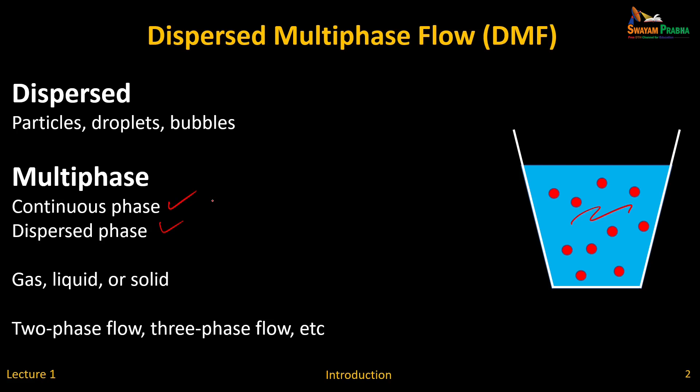Now, as all of us know, each of those phases, both the continuous phase as well as dispersed phase, can be gas, liquid, or solid. And also there's no reason for limiting to 2 phases. You could have 3 phases, 4 phases. And of course, the more phases, the more difficult the problem gets. Okay. You can have 9 different combinations because continuous phase can be gas, liquid, or solid, and dispersed phase can be gas, liquid, or solid. So there are many examples.

So you can have what are called gas-solid flows, and I've given a bunch of examples: volcanic eruption, dust pollution, so on. And gas-liquid flows, you have rain or fuel spray, or even when I'm talking, I'm throwing a lot of droplets around. So those are gas-liquid flows. Gas-gas flows doesn't make any sense because they are going to mix easily. When you have a multiphase flow, if everything mixes very quickly, then that becomes a single phase. Okay, so therefore gas-gas is out of question.

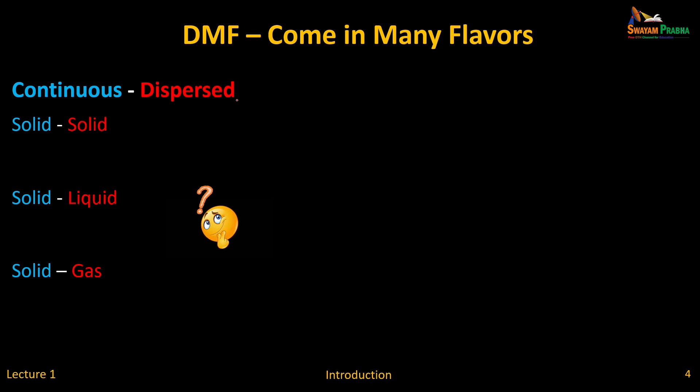And of course you can have liquid-solid, liquid-liquid, and liquid-gas. So very many different. So in one stroke we are trying to, in this course, cover some basics that will apply to all these problems. Okay. Of course, can the continuous phase be solid? Can you have a solid flow, solid-liquid, or solid-gas flows? What do you guys think?

I think so. Yes. Powder is flowing and there is a lump of solid in it. So the powder behaves like one fluid and the particle behaves in the other phase. That's right, but I'm talking about the continuous phase being solid. Powder. Yeah, you're right. You could have a powder flowing through a slope. Yeah. A lot of powder sand flowing through a slope, and there is a lump of solid inside it.

No, you're absolutely right. I was also thinking of, for example, in high-speed flow shock problems, this is a very important thing because you can have a solid within which you could have voids. It could be an explosive, for example, and you smack it very hard, it starts flowing. So in other words, what becomes a solid at a very high strain rate may behave like a fluid. It may not behave like air or water, but it may end up flowing.

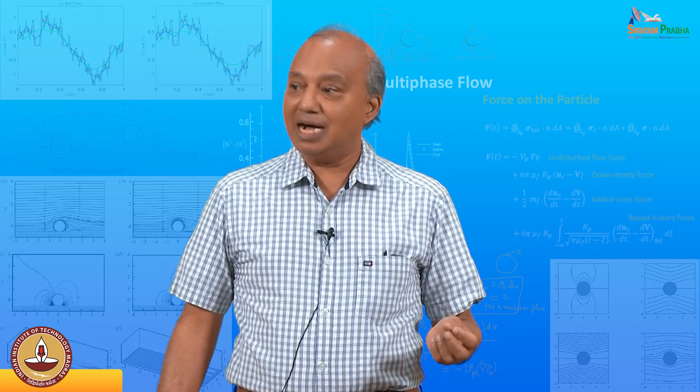So you could have very complex sort of dispersed multiphase flows, and as he points out, you could have a solid powder flow in which other particles could be embedded in there. Okay, so every variety is there in this problem. And also one of the things that makes it really vexing is that there are too many terminologies. There's particle-laden flows, droplet-laden flows, liquid sprays, bubbly flows.

So one of the things is there is no one set of governing equations. It's not like Navier-Stokes equation. That's one set of equations there. You go there and you solve it, then you're done. Multiphase flow, what makes it very hard is that there is no one set of go-to equations. Everybody decides upon a certain set of equations, and usually very smart people, they make a lot of assumptions depending on their application.

And this whole course I'm going to talk about is how do you simplify the governing equations so that you can get something useful out of your analysis. Okay, so that's the kind of focus. So be careful that there is a lot of interesting physics there, but there is also a lot of confusing terminologies out there.

Now, one of the things I would say is that if somebody asks me what problem you're working on, I say that it's sort of every problem around us; virtually in some way or other, it's a dispersed multiphase flow. So you have volcanic eruptions, so a lot of problems in nature are multiphase flow. So you have a dust storm, here a supernova, or it could go to the other extreme. These other three problems are at very gigantic scales.

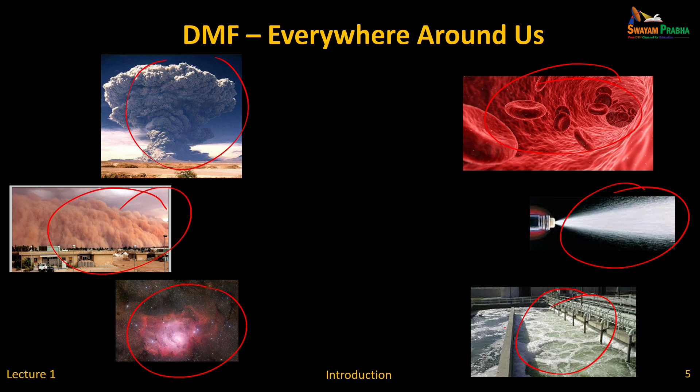On the other hand, you have red blood cells flowing, or an engineering problem such as a fuel spray or cleaning of wastewater. So examples are galore. What makes multiphase flow really interesting and at the same time really hard is the fact that you have two phases and they are talking to each other.

So you have the fluid phase, the liquid or the continuous phase, many different ways I will call that. It's sort of the one that permeates everywhere with holes in it. And the dispersed phase, which in this case I call particles. By the way, I will call them particles, but they could be droplets or bubbles as well. So you have two different phases, and we all know that fluid parcels talk to each other. In other words, they rub against each other.

So you have the fluid's Navier-Stokes equations. That's what takes care of the fluid interacting, the continuous phase interacting with itself. And the continuous phase interacts with the suspended particles, droplets or bubbles, by applying drag force or lift force, heat transfer, or it could have evaporation, mass transfer.

So the continuous phase talks to the dispersed phase, and the dispersed phase will talk back to the continuous phase. Forces applied on the particles and droplets must, by Newton's third law, be applied back. If there is evaporation, it must go to the continuous phase. So there is what is called a two-way coupling. The continuous phase talks to the dispersed phase and the dispersed phase talks to the continuous phase.

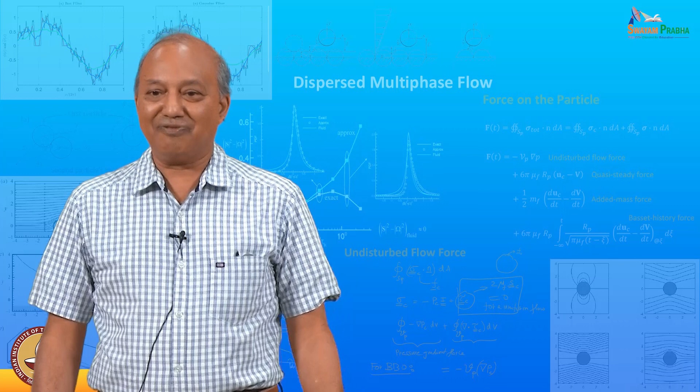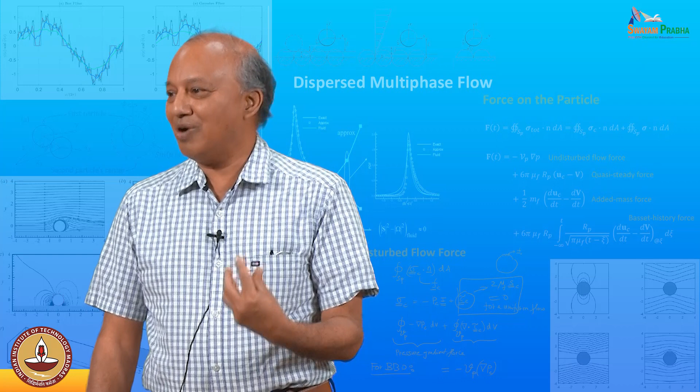Sometimes you might say, well, the back effect on the fluid is not that important because there are too few particles there, so let's ignore that. Or you may say it's very dilute, why bother with interaction between particles? That's the kind of judgment we will learn to make: when to throw things out and when not to. You want to throw out the bath water but not the baby with it. So that's the separation we will learn to make in this course.

But when you think about it, what you have is a continuum, which is the fluid phase, and it exists only outside the particles. And the particles, mostly we will talk about rigid particles, so they follow rigid body dynamics. So you don't have to worry about the flow inside. But if you have a droplet or a bubble, flow inside can also be important. So you have to consider all of them.

So there is interaction happening between the outside fluid and the particles. So when I talk about the fluid interacting with the particles, I am talking about truth, which is you have to look at the pressure field around the particle, shear stress around the particle, each and every particle, and you want to see how they move. Okay. In fact, yours is a great question.

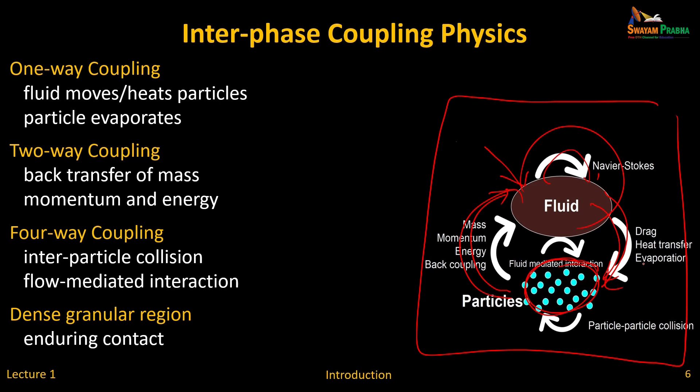So that's what makes this problem really hard. Let's say you have a fluidized bed. There are a trillion particles in there. Literally speaking, you got to take each of those trillion particles, look at the fluid mechanics around it. Even if they are rigid, they are moving, rotating. You got to take care of all those things. When I draw this picture, I'm talking about everything, like playing God. We know everything, okay? But then obviously that's not possible with a finite computer.

So how do you make those judgments? How do you make those reductions? How do you make it simple? So it's a question of modeling. As the saying goes, all models are wrong; some are useful. That means we understand the full physics, but then we try to reduce it to something that's solvable. You get a useful equation. If it is just an algebraic equation, so be it. Or if it's got to be a supercomputer simulation, we got to do it.

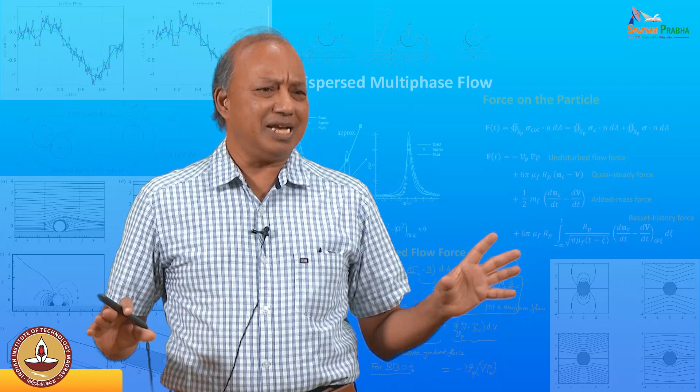Sometimes the problem is so hard that we will get only approximate answers. So those are the kind of stuff. So at this stage, I'm talking about the whole story. Okay, I haven't started making any assumptions yet. Any other questions?

So one of the things that makes this problem hard, as you asked, is that the range of scales is too many. Okay, when you go to very small scales, you may have issues such as viscosity, thermal conductivity, and so on. We are not going to talk about this a whole lot. We are going to take for granted that we know the viscosity of the fluid, and the particles, say, are rigid, and so on.

But now you also have microscale physics in the sense that you have particles, they may be 100 microns, a millimeter, depending on your application. And you can also think in terms of interparticle distances. Maybe on average they are a millimeter apart, and so on. So you could look at it from a microscale point of view, what's happening around one particle, what's happening around a cluster of, say, a few hundred particles.

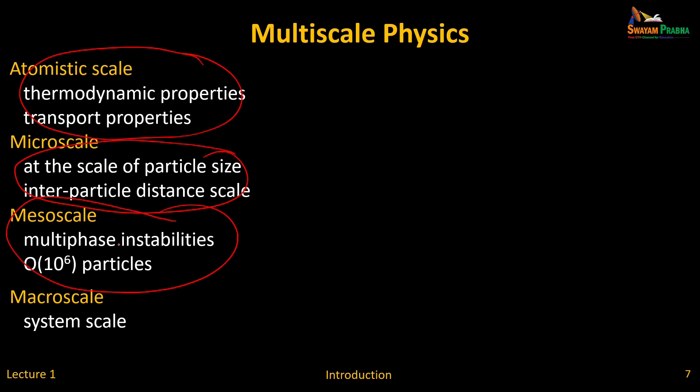Okay, because if they are going to be influencing each other, you need to know how they line up. Do they all line up one after another, or are they completely random? Those kind of questions become important. Now another thing that's very interesting is that these flows naturally segregate themselves into clusters of particles. Okay, and I will show some examples of it.

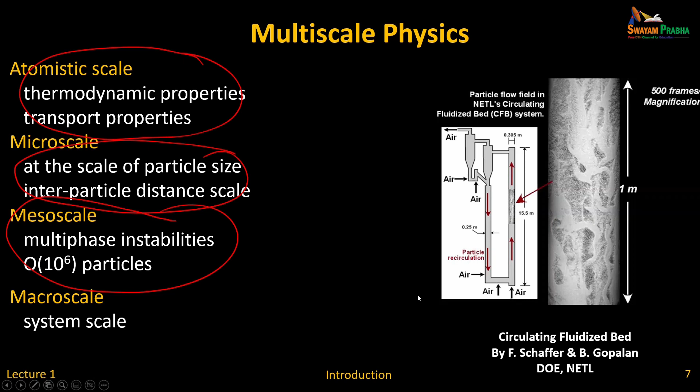Say this is one video, you may have seen this. This is a fluidized bed, circulating fluidized bed. It was taken at NETL. Okay, it's a really beautiful video. Let's see if it plays. Okay. So you can see they will keep zooming in. So now it's zoomed in. You can see clusters of particles and void regions, so you can clearly see that.

So I would call this a microscale view: what's happening around individual particles and their interaction. Okay. Now when you zoom out, you will see mesoscale. Mesoscale are the big sort of clusters of particles and void that you see. And the macroscale could be your entire setup.

So in other words, one of the nice things about dispersed multiphase flow, I see, is it naturally lends itself to this division. So what happens is that we cannot take care of every single particle and what goes on around each of them and at the system scale at the same time. So our best strategy is divide and conquer.

And divide and conquer, in this case; many times if you just have turbulence, the same problem occurs even in a single phase turbulence. But one of the biggest challenges there is, how do you divide? What do you divide? So here, a nice thing about multiphase flow that I find is that there is a natural length scale that tells you, okay, I can look at 100 particles or 1,000 particles, that's your micro scale. Maybe I look at 1 million or 2 million particles, they form layers of particles or clusters. Maybe I can study them. Then we study the whole system. So in other words, this multi-scale nature of this problem is something that we are going to be focusing on.

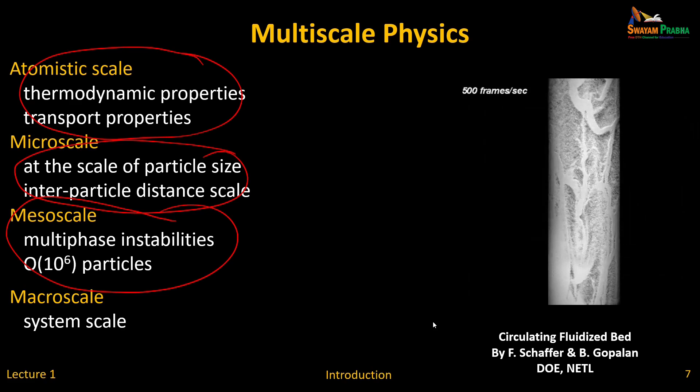So if you want to study a fluidized bed in its entirety, of course you can throw it in the computer and there will be lots of models in there and you produce pretty pictures, etc. But what I want to talk about in this course is that you want to be questioning all those models that go in. So if you simulate the whole fluidized bed, is your simulation understanding the fact that there are layers of clusters and voids in there? How do you take care of it? Or are you worrying about the drag forces on individual particles? Have you taken it correctly? Are particle-particle interactions being taken into account correctly? They are all there in the models, but how good are the models?

Sometimes they are good and you may say, yes, it's fine. Sometimes you may say, well, this model is good, but this model is not good. The uncertainty or error in this model is very big, so I want to improve that. For that, you may have to go to a micro scale or meso scale study of that smaller scale in greater detail, develop your models and then send them to your big simulation. How do you do those things? Those are the kind of things I would like to discuss in this course towards the end.

Now in terms of introduction, what really makes multiphase flow really hard is that it is invariably turbulent. It could be classical turbulence or it could be what is called pseudo turbulence. Even if you have a slow moving laminar-like flow, since particles are always going to be randomly distributed, they are going to bump into each other randomly. Even in a laminar flow there is going to be pseudo turbulence. So this random position and motion and the chaotic flow around them contributes to what is called pseudo turbulence. So in some ways you can argue that the particles are going to be increasing the turbulence. They are going to change the turbulence of the flow.

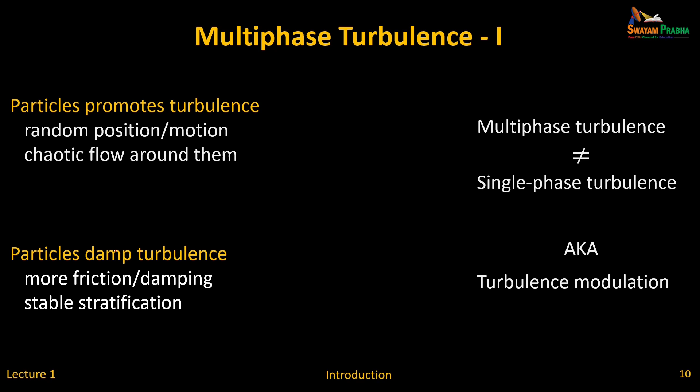So in essence, multiphase flow turbulence is not the same as what would exist if you removed all the particles. For example, for a single phase gas or liquid pipe flow, there's a lot of literature on turbulence, a lot of understanding, a lot of models. But if you throw a lot of particles or bubbles in there, you just can't use the same turbulence models anymore. It just changes and the problem gets really hard. In fact, we know the turbulent pipe flow profile. Now depending upon the size of the particles and density ratios, the turbulent profile can profoundly change.

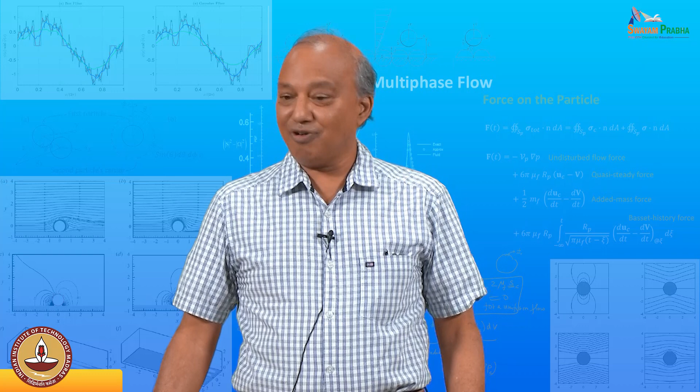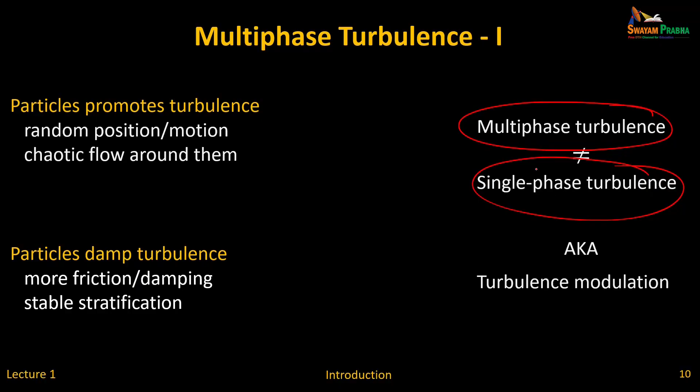Therefore, people don't know offhand what the answers are, and that's what makes multi-phase flow a very rich problem. Okay. So, Bala? Yes. So if you have a laminar flow and you were to put particles in, could it become turbulent? Yes, that's also possible.

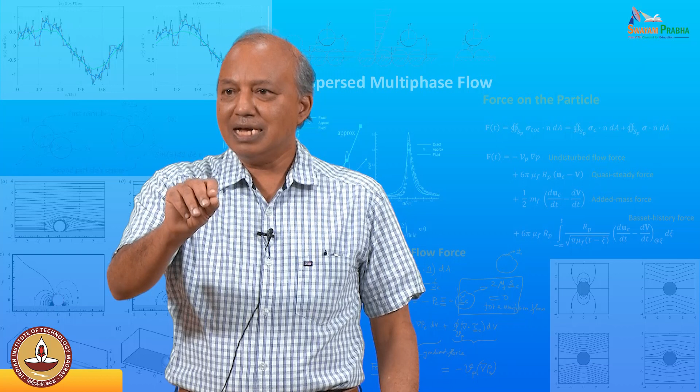In other words, if you put a velocity probe in a laminar pipe flow and you put particles, you will see signatures. It won't be a single phase. In a single phase, at that low Reynolds number, you may get a constant velocity measured by the probe. But each time a particle goes by, you could have a wake effect of the particles and you have signatures, and the particles are arriving randomly because they are not in a lattice. Therefore, you will get turbulence-like signatures.

In fact, your question is very good, in that some of the Kolmogorov theories don't necessarily apply to this turbulence anymore. So the closures that people use for single phase turbulence are not necessarily good for multi-phase turbulence. And I will say more about that.

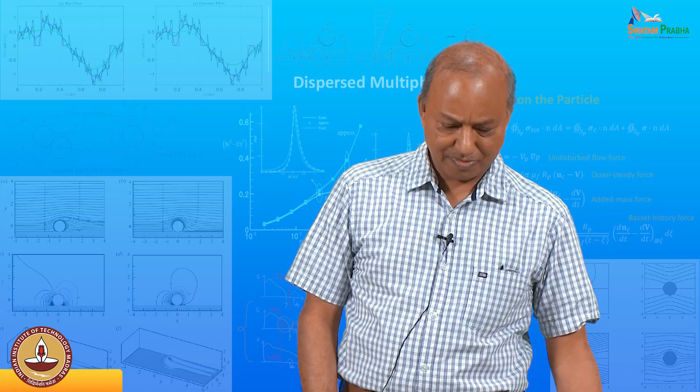The other thing is, in turbulence, we say turbulence mixes, right? So when you put particles, let's say you have a bucket, that's the usual example I use. You have a bucket, you stir, you create turbulence, and you put a lot of sand in it. Let's not worry about settling, okay? The question I ask is, is the sediment concentration going to be uniform? You would think so, right? You drop ink in there, some dye, it will spread very well. What turbulence does is it mixes. So you would expect that the turbulence will mix particles very well.

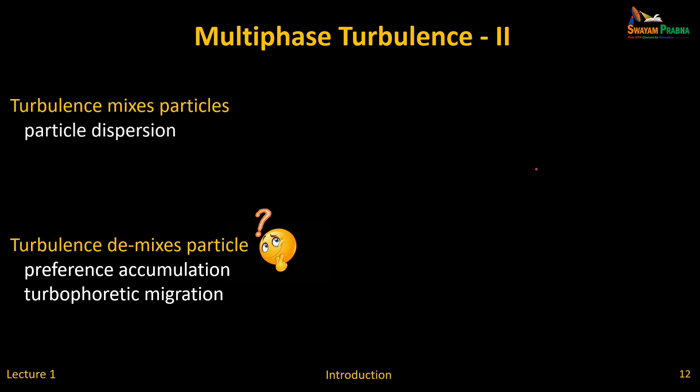But the strangest thing is that turbulence also demixes particles. The easiest way to think of it is that turbulence is a bunch of eddies moving around. What do eddies do? They spin out heavy particles, and things that are light, like bubbles, go to the center of the vortex core. So when you put particles, naturally they will demix. So there is mixing as well as demixing. So turbulence plays a dual role.

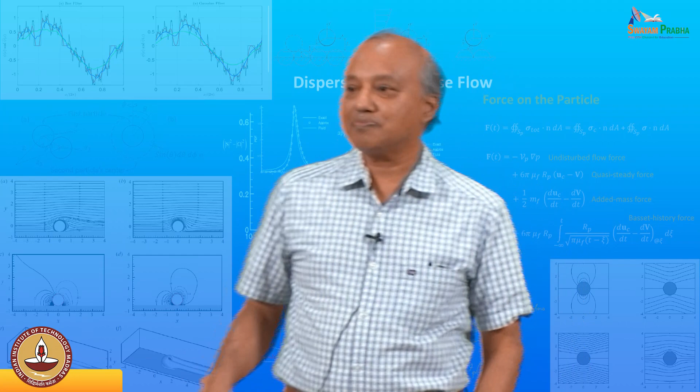Just like particles, how did they affect turbulence in the previous slide? I said they can enhance turbulence or damp turbulence. And turbulence can mix particles or demix particles. So the point is that it's a very complicated problem. Yes? I think cohesion and adhesion might be responsible for this, the change in mixing and demixing of the bubbles and all. Is there any other parameter responsible for this?

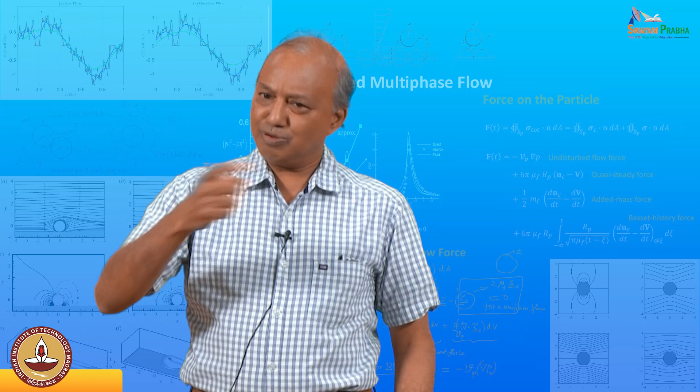Collision will play a role, but think of it this way. You have an eddy spinning around and you put a particle which is heavier than the fluid; it will go, but it will not closely follow the streamlines of the fluid because the particle is heavier. It's sort of like having a stone tied at the end of a string, and you do this, you let go, it wants to spin out. Same thing happens, heavier ones will spin out. So particles in a vortex will avoid the core of the vortex and they will congregate at the outside.

That's called preferential accumulation. Whereas on the other hand, lighter things like plastics and bubbles will be attracted and come to the center of the vortex. And this is really happening, because in the ocean there are big gyres, and all the garbage that we throw in gets collected at the center of the vortex core. So this is a general rule. Lighter particles go to the center of vortices and heavier particles get spun out.

Therefore, in turbulence, if you have particles that are very small, they behave like molecules and will be evenly spread. But when they get to the right size, they may get spun out depending on the density ratio, or they could aggregate in some specific regions. Therefore, if you have a turbulent flow and you want to know where the sediments or sand particles are, well, it depends.

Okay, if the Stokes number, which I will talk about later, is right, they will demix. They will not be uniformly distributed. There will be regions where there are more particles. There will be regions where there are fewer particles. Okay, so that's what I was talking about.

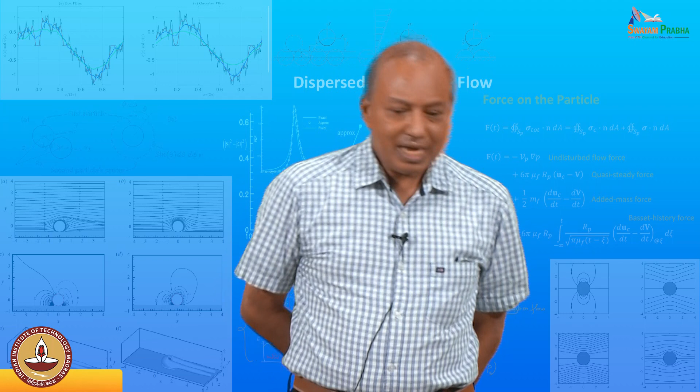Yes. So do you expect the behavior of the particles at a micro scale to mimic the behavior of atoms at an atomic scale? It will not, because atomic scale processes are generally non-dissipative.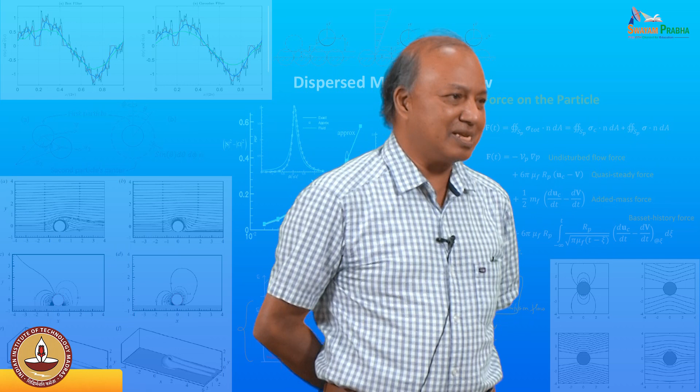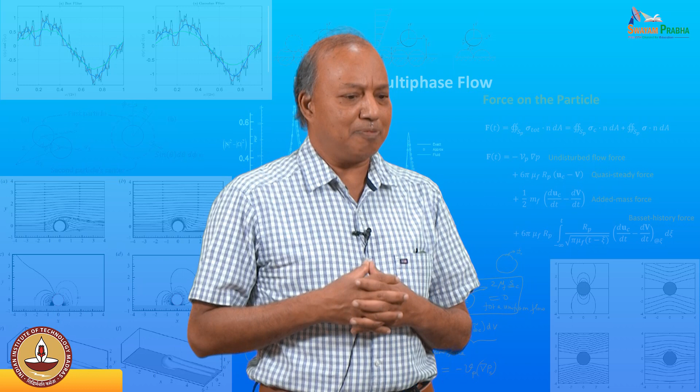But molecular scale processes are not dissipative, and so there is no analog, for example, for demixing in a molecular scale. That's actually a great question. In my group, I try to get a lot of inspiration from molecular dynamics and those atomistic scale processes in modeling, but those lessons that you learn can only go so far. The analogy is not perfect.

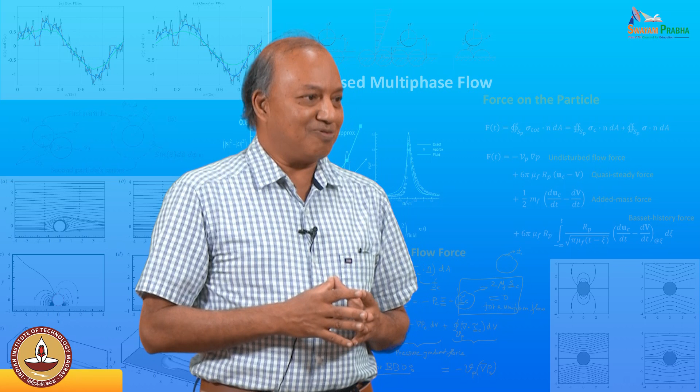Nonlinearity and other things are what make fluid mechanics much harder in a way, because the molecular processes you could average and you call pressure, viscosity, thermal conductivity, things that nicely come out, but there is no universal closure model for turbulence. And now particles behave the same way as fluids, so closure models of multiphase flow are not universal. So that's bad, but on the other hand, that gives us all the job, because the problem is not solved.

So does that mean it's kind of a scale problem? If we are looking under a microscope at a small vein, then we would consider red blood cells to be separate. But if we're looking at a lot of blood flow, we would consider it as a continuous medium. So can we make use of that?

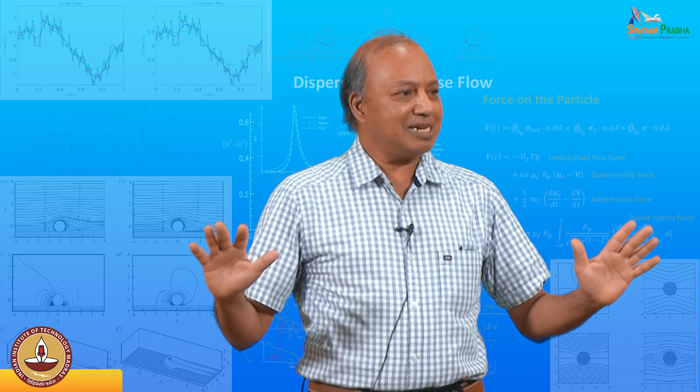In atomic scale processes you have randomness, and if it is in a predictable way, you can average easily. Here, when there are lumps here and there and you don't know how they are distributing, even averaging becomes hard. So that may be the answer to your previous question: we all know we need to average, but when you're averaging over a certain volume and it's not uniformly painted there, how do you average?

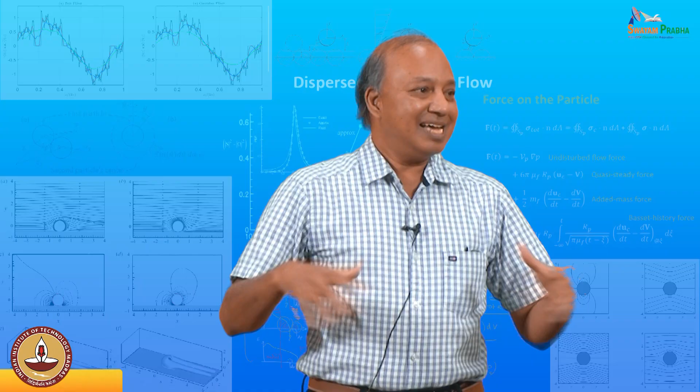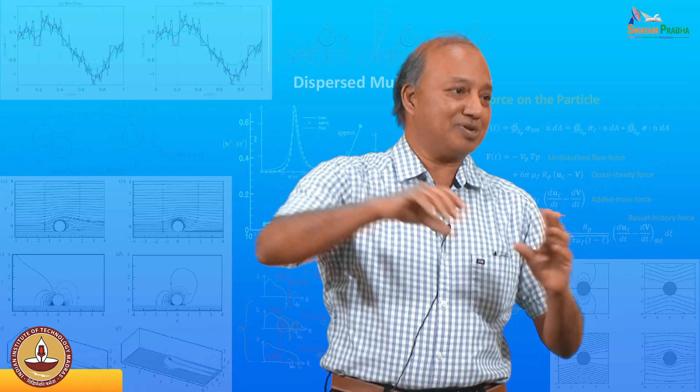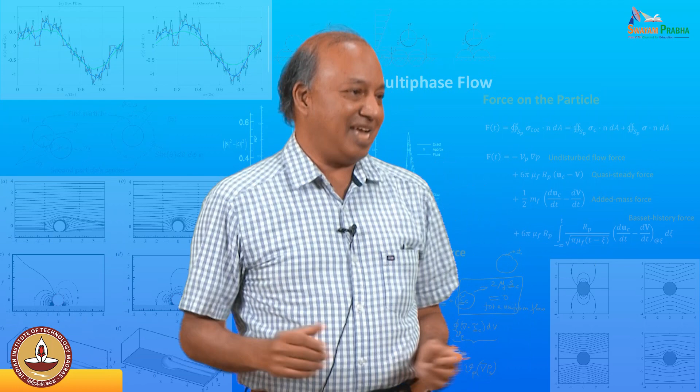It changes from problem to problem, and therefore when you're averaging over a meter scale, you want to know what's happening on 10 centimeter scale, 1 centimeter scale, on 100 micron scale, and the processes are very complex. You really have to come to grips with what's happening at every scale if you want to have good models at the macro scale. That's what we lack, and hopefully we will all contribute to those model developments and closures.

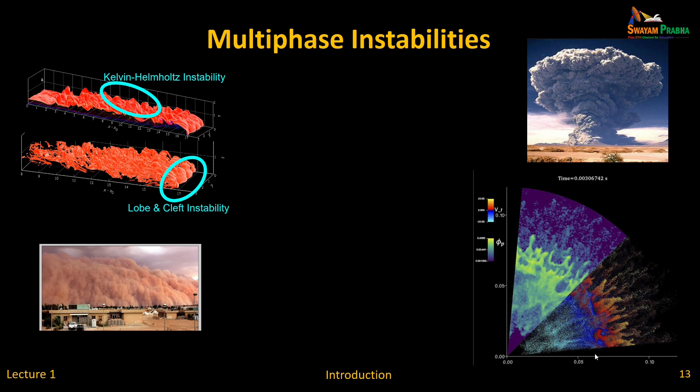So what I'm going to do is I have broken up the topic into many sub-lectures, some of them longer, some of them short, and then we will stop, I will take questions, and then we will start another one. Any questions on that so far?